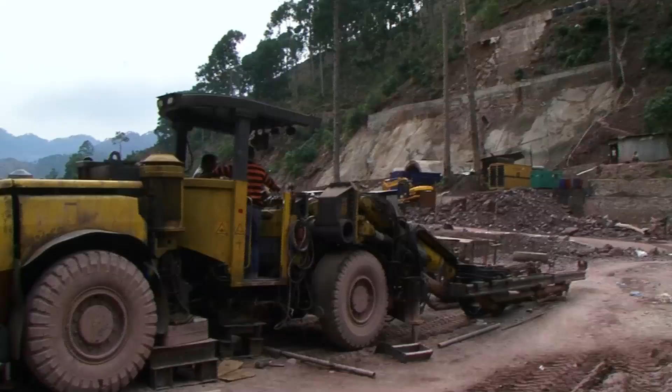Cradled in the lap of the majestic Himalayan mountains, Kashmir Valley is crowned as heaven on earth. In spite of the looming threat of terrorism, Kashmir is undergoing a paradigm shift in its developmental activities, connecting its vast inaccessible areas, bringing boons of technology and benefits of civilization to snow-capped mountains and beautiful landscapes.

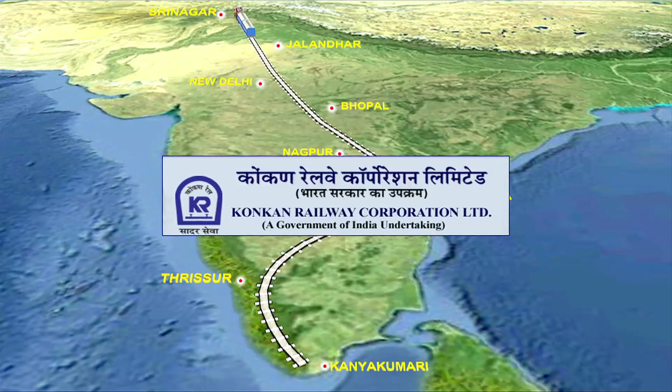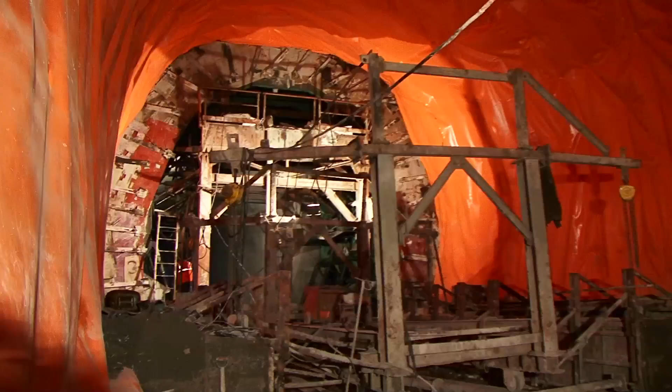With the aim of connecting Kashmir to Kanyakumari via railways, construction of the Udhampur-Srinagar-Baramulla new BG Railway Link project was undertaken by Konkan Railway Corporation Limited to improve interconnectivity within the state of Jammu and Kashmir. Difficult terrain, harsh climatic conditions, snowfall and severe winds throw steep engineering challenges that pose a threat to this national project.

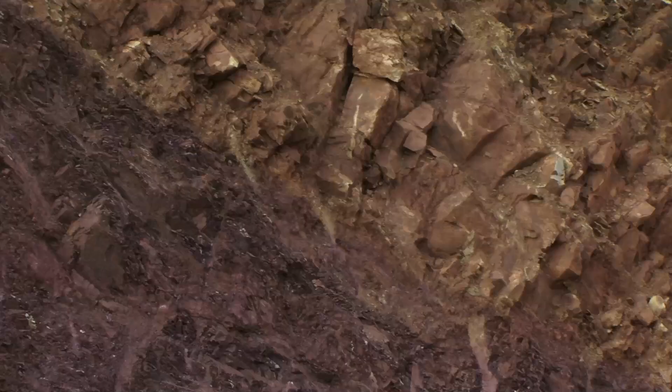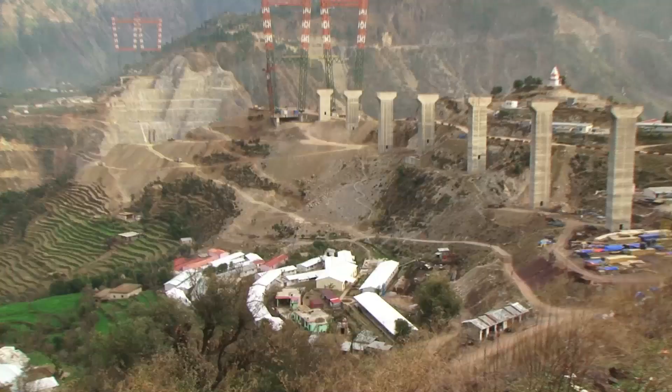The mountain ranges along the Chenab River Basin are made of sedimentary rocks, which is very different from the rock quality experienced by KRCL in the Western Ghats. A work stretch of 22 kilometers in hilly terrain with poor rock formation, landslides during monsoons, and similar other geotechnical issues were worse challenges. In addition, remote and inaccessible locations with narrow, heavy steep gradients and almost no road condition constituted tremendous communication constraints. Availability of resources posed a problem, with the nearest city Jammu being 125 kilometers from the Batli camp project site.

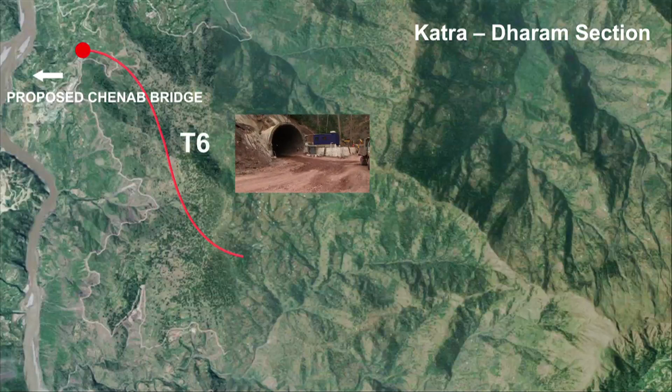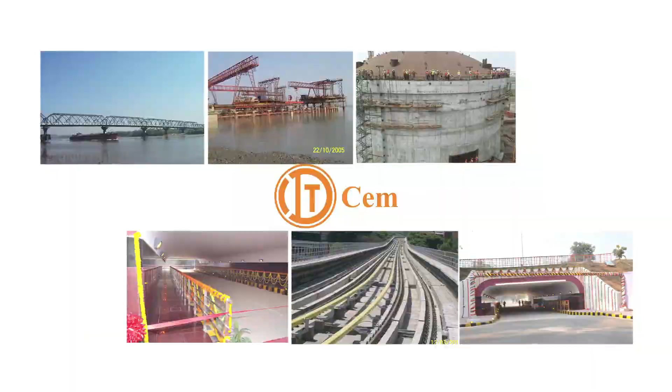KRCL awarded construction work of tunnels T6, T9, T10, T11 and T12 between Kauri and Dugga on the Katra Dharam section to ITD Cementation India Limited, a company with more than 8 decades of expertise in design and development of infrastructure in India.

Tunneling in India is always a challenging task, but if it is in the Himalayas, then it becomes more difficult. To overcome these things, we made extensive planning. We have mobilized state-of-the-art equipment so that the work can be done smoothly. We have also engaged experienced and trained engineers along with experienced technicians for safe and hassle-free work.

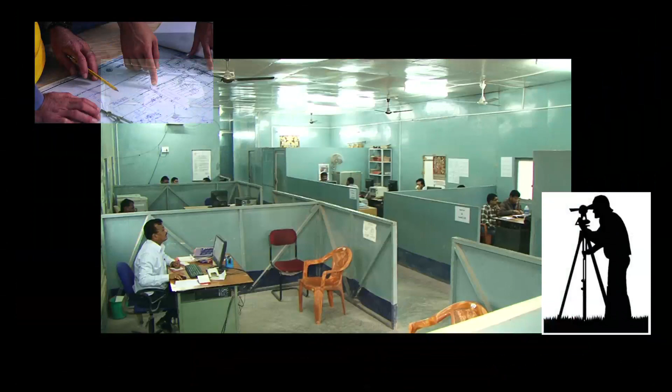Comprehending the challenges of this project, ITD Cementation India Limited brought in a huge pool of qualified personnel commensurate with required expertise, including geologists, surveyors, civil engineers, mechanical and mining engineers, safety engineers, and other technical experts to handle any situation and provide quick and efficient solutions to problems as and when they arise.

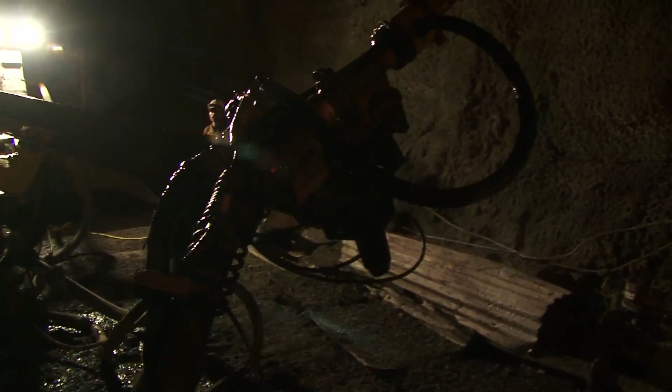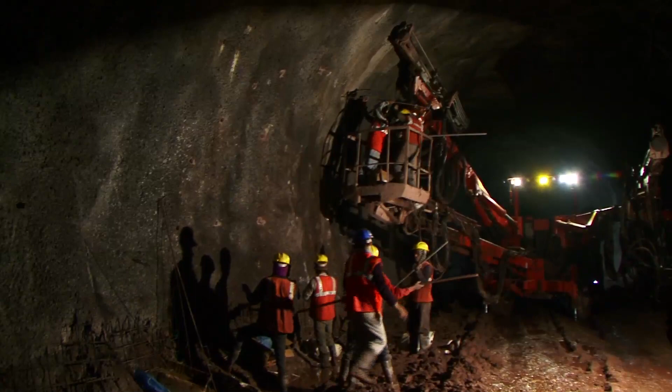All major high-tech equipment and machinery required for this project have been imported, and some designed and fabricated in-house by ITD Cementation India Limited. Specially imported machines like the Sika shotcrete machine and twin boom jumbo drill machines are important machines of tunneling and require regular maintenance from skilled mechanics.

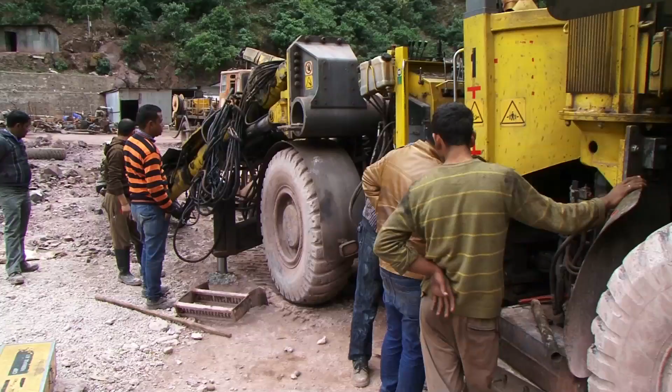State-of-the-art workshops are equipped with all required machinery and skilled workforce to handle any type of breakdown of machines and equipment. It reduces idle time of machines and improves cycle time of tunneling activities. As a result, ITD Cementation is in a position to address any issue concerning machinery immediately during project execution, saving time, cost and eventuality.

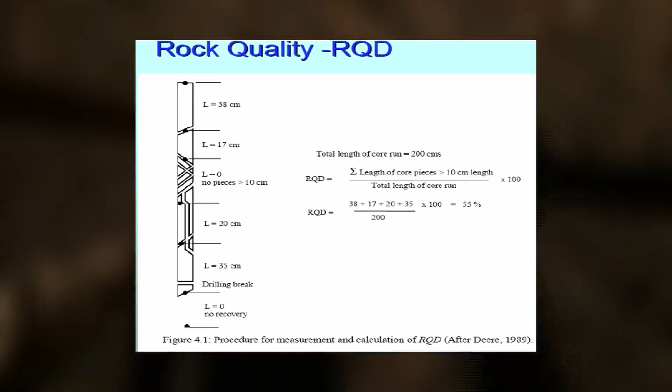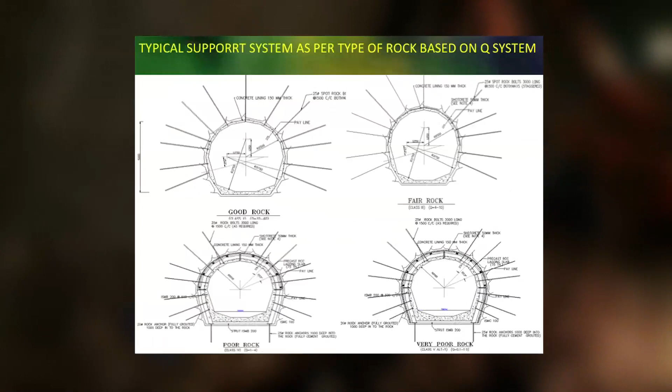Tunnel excavation is being done following the NATM method, wherein systematic analysis is done of rock quality and a systematic support system is provided as per classification of rock by expert geologists. For classification of rock mass, the Q value system is followed.

Geologically, our project lies under a very young formation. It is sedimentary rock, and the main types of rock we found under the tunnels are sandstone, siltstone and claystone. But the dominant rock is siltstone. It doesn't have good strength.

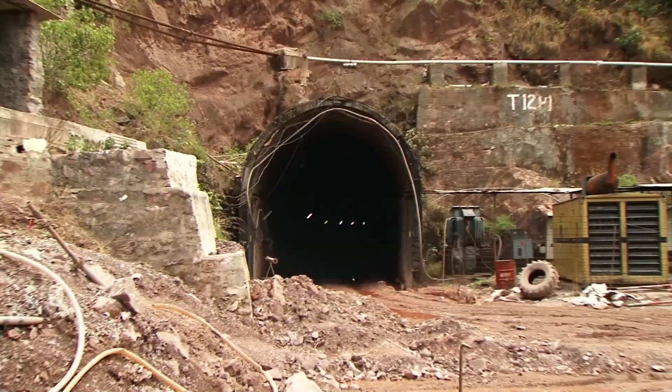Each and every aspect of tunnel construction is monitored. If a problem crops up that cannot be solved at site, headquarters is informed and response time is immediate. More experts arrive and, together with the existing bandwagon, they put their heads together in finding an immediate solution.

The first step undertaken in this project is creation of approach roads to sites of operation. A base camp is set up at a suitable location near the project site, followed by a site office. For every tunnel to be constructed, operating sites are identified and set up by installing necessary infrastructure, machinery and equipment.

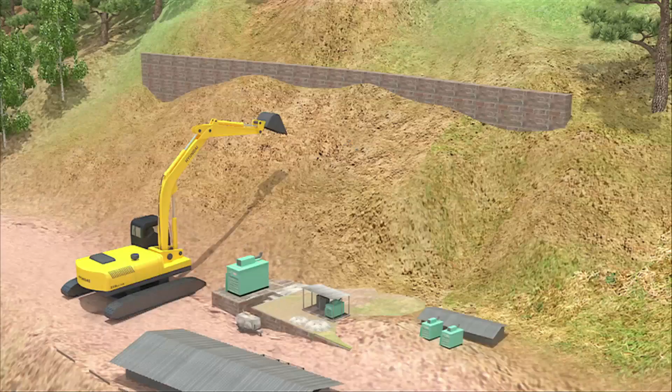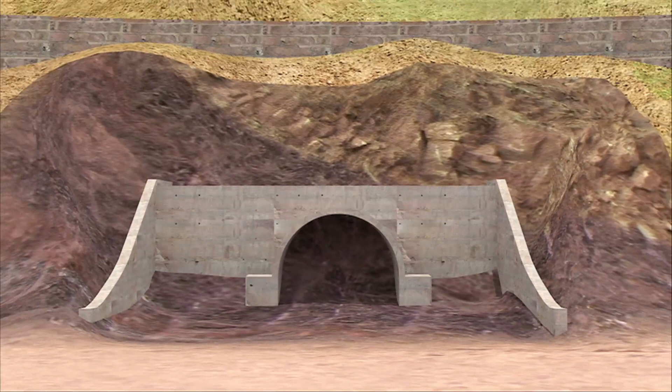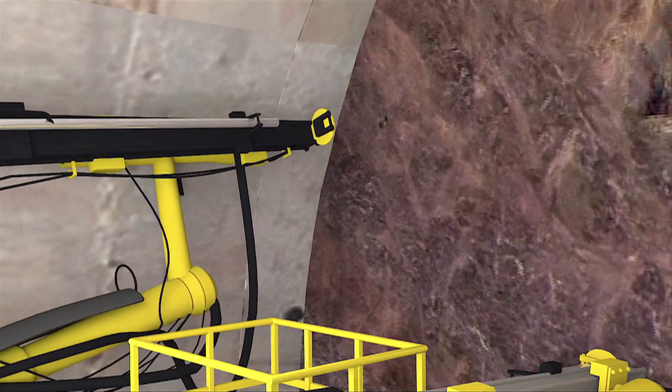Before the actual tunneling process starts, a false tunnel section is excavated and RCC lining is done, and then actual tunnel excavation begins. Actual tunneling starts with portal construction, with size greater than the actual tunnel size. Pipe forepoling with high pressure cement grouting is done for roof stabilization.

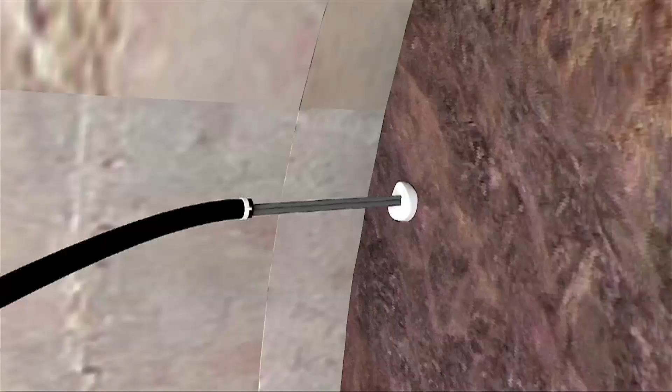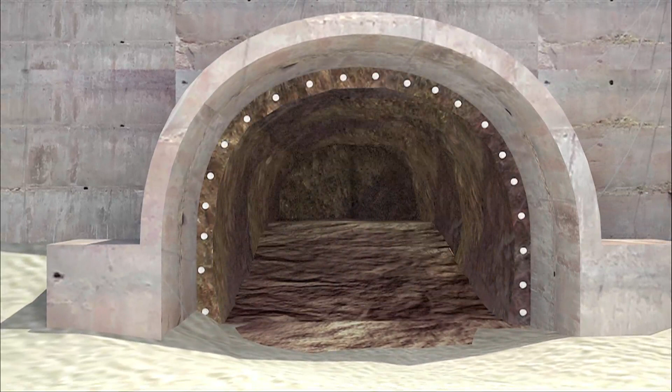And then actual face drilling starts with twin boom jumbo drill machines, followed by charging and blasting with explosive drilling. Blasting is carried out from center in small units for a distance of 10 to 15 meters, creating pilot holes. Eventually, the full shape and size of the tunnel is achieved. Now, repetitive tunneling method begins.

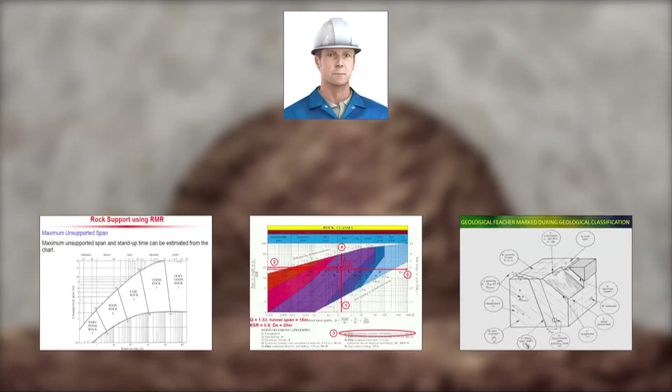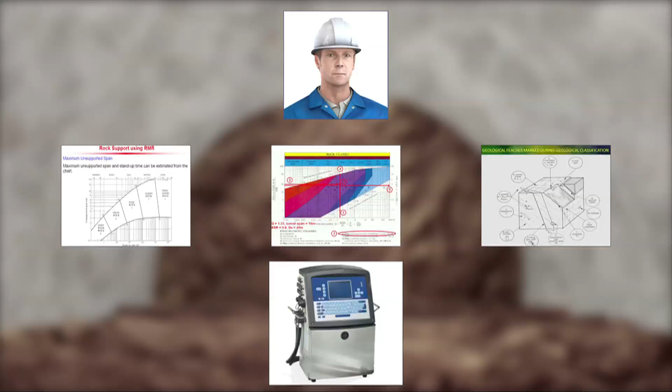Geologists and surveyors analyze class of rock after every round of blasting operation and find Q value and RMR value. Depending on the class of rock, rest of tunneling steps to be undertaken is formulated. Geologists and surveyors collect data with help of profiler machine and plot them on paper. Charging patterns change with change in rock class.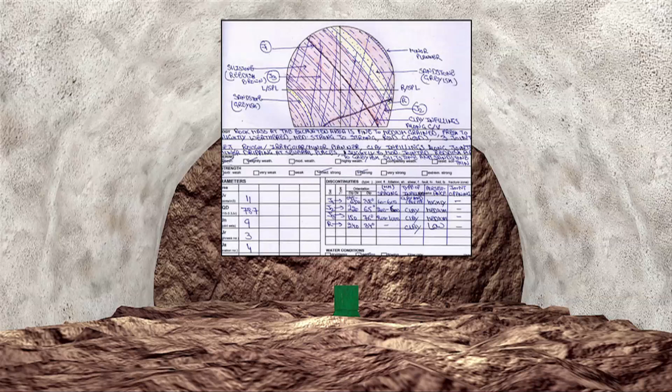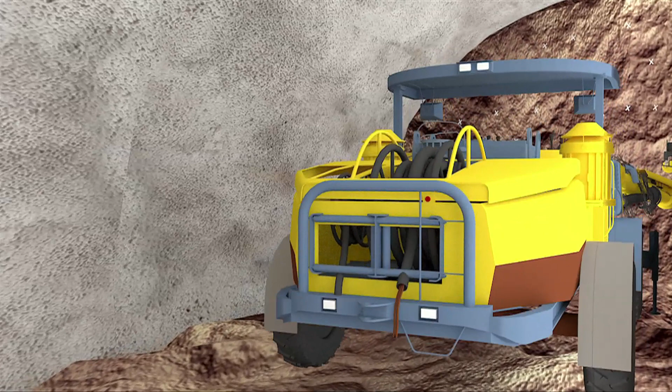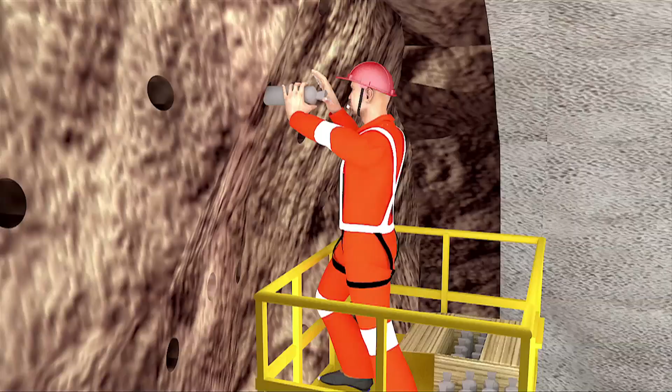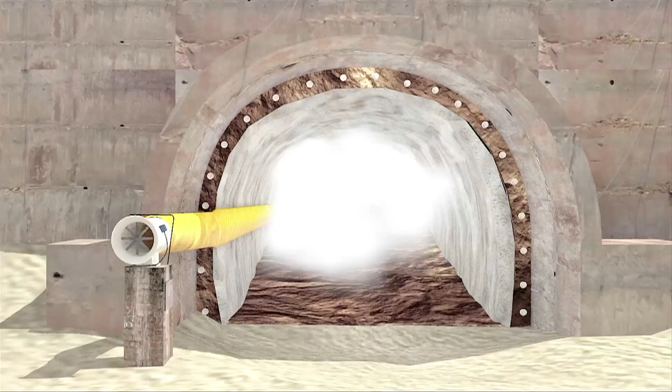Based on this data, drilling and blasting pattern is prepared. Drilling and blasting is carried out as per design pattern. These, along with charging pattern, is the heart of successful tunneling. It is followed by defuming for about 30 minutes. Water is sprayed all over blasted surface to settle dust and to reveal cracks and fractures.

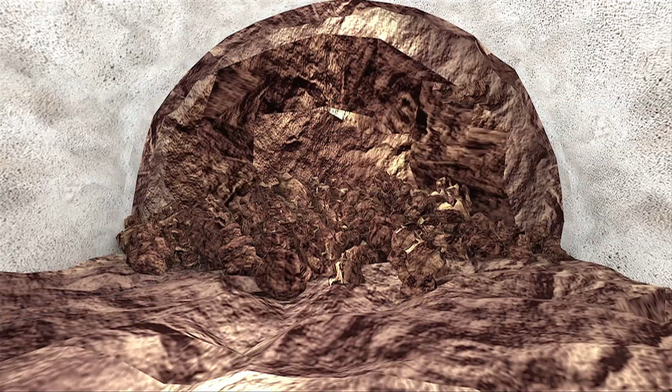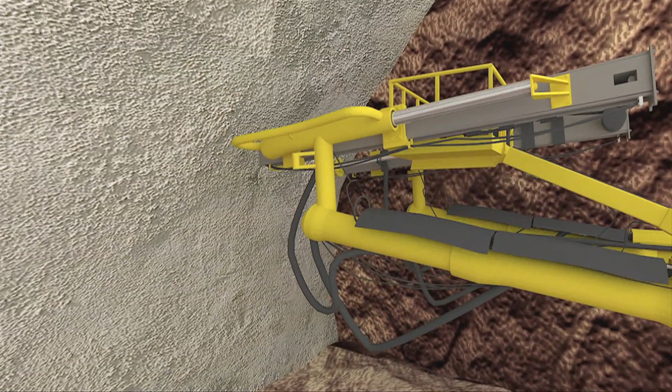Next step is mucking. Once muck is removed using excavator, geologists and surveyors again evaluate region, provide support system design and collect data for the next blast. Primary shotcreting is done with robo-arm shotcrete machine. Rock bolt drilling and grouting is done as per rock bolt design given by geologists.

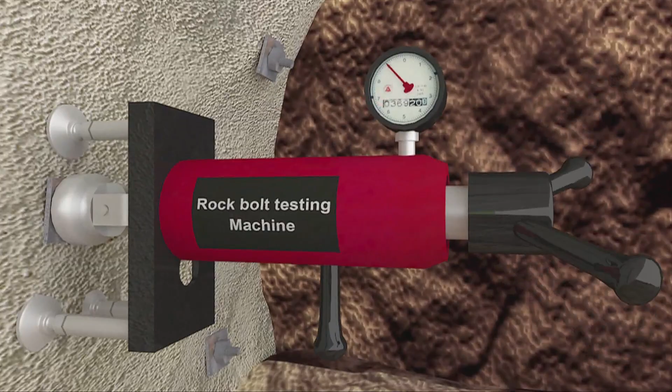Depending on rock class, plates are fixed and bolted and predefined amount of torque is applied. Rock bolts are then tested for load-bearing capacity after 15 days. As per requirement and based on geological evaluation done by geologists earlier, preliminary support structures like wire mesh or lattice girder may be erected, after which final layer of shotcreting is done. The process is then repeated for next round of blasting as per the requirement.

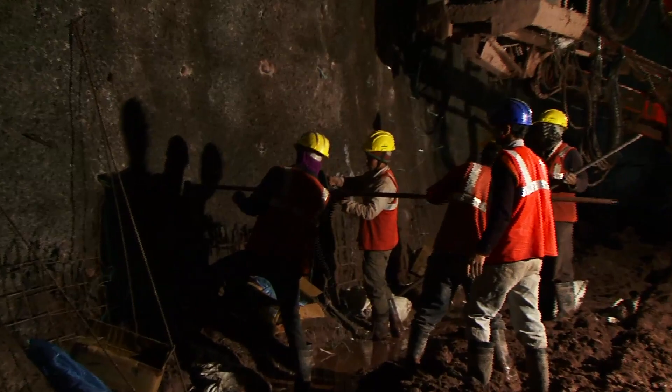Monitoring of critical aspects with instruments such as extensometer, pressure cell and load cell are carried out after every 10 meters of tunneling. If there are any variations or problems, adequate steps are taken to correct them, like changing supports and so on. Following this methodology, tunnels 6, 10 and 11 are being constructed from both ends, while tunnels 9 and 12 are being constructed from one end.

In case of tunnel construction from both sides, when 10 meters is remaining in between, a central hole is drilled from one side to the other to check and maintain alignment. Then one side is closed and digging is completed from the other side. For rock class 3 and above, the tunneling is done first with heading, and then in the same process, benching is completed.

Once tunnel has been excavated from one end to the other, entire tunnel is cleaned. Geologists evaluate and survey once more. Gantries are introduced into tunnel if possible, from upward direction to downward direction. Geotextile membrane and waterproof membrane are fixed to ensure no seepage water comes after lining.

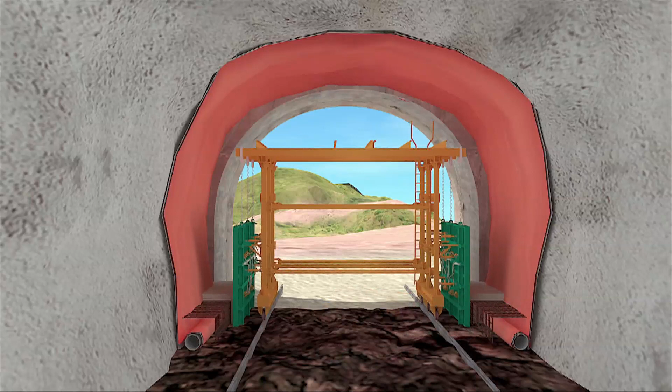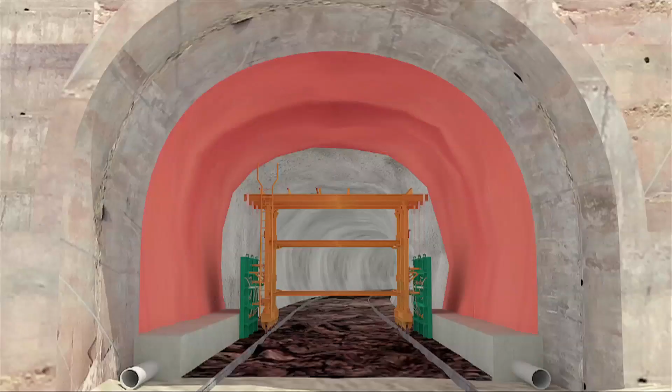Kicker gantry pours concrete on two sides, creating side slabs. Perforated PVC pipes are embedded into them. Then kicker gantry moves forward. Main gantry is then fixed, which pours concrete by pumping and completes concreting process.

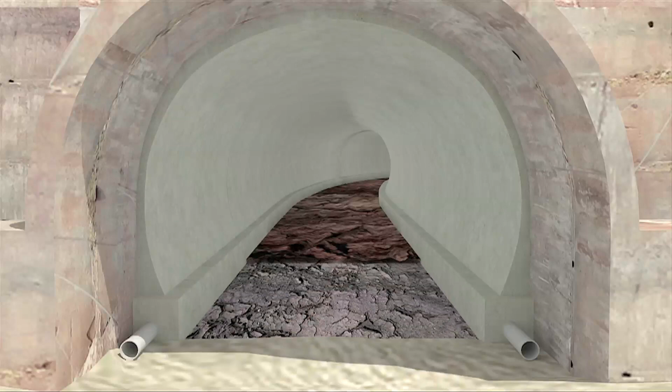Once entire tunnel is completed, kicker gantry and main gantry are dismantled. After that, floor is washed and cleaned. RCC concrete is poured. In this way, kicker arch and invert concreting are completed. All the portals are finally stabilized with required support measures to ensure no loose fall occurs.

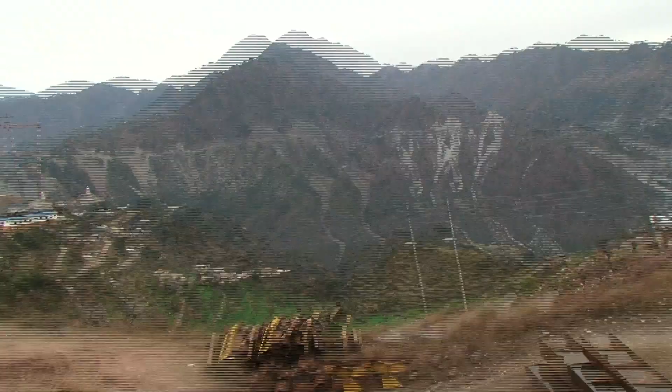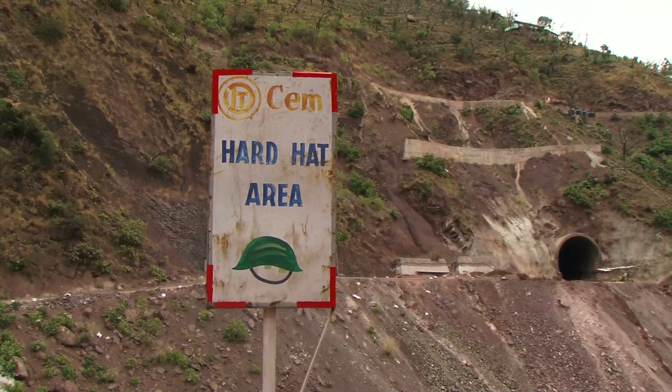Due to adverse geological and weather conditions, safety plays a critical role. Risk assessment of each activity is done in advance, and controlling measures are also taken to reduce risk from technical or administrative measures. Regular toolbox talk, training and induction are routine jobs. Complete injury-free site with zero accident is the set goal of the company. Due importance and care is given to environment and ecology of nearby site area by safety department.

Our site target, zero accidents. For achieving the target, we have done risk assessment, training, toolbox talks, periodical audits to check our system to enhance the project.

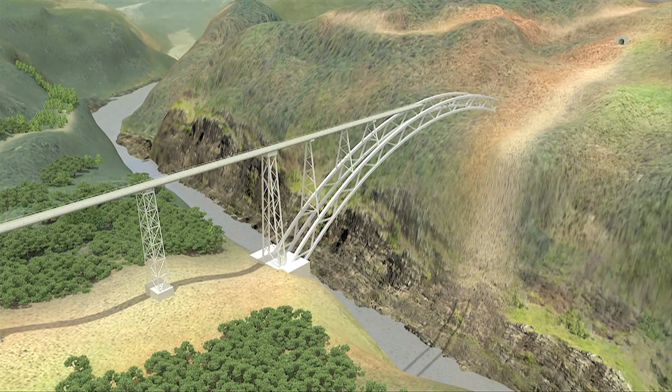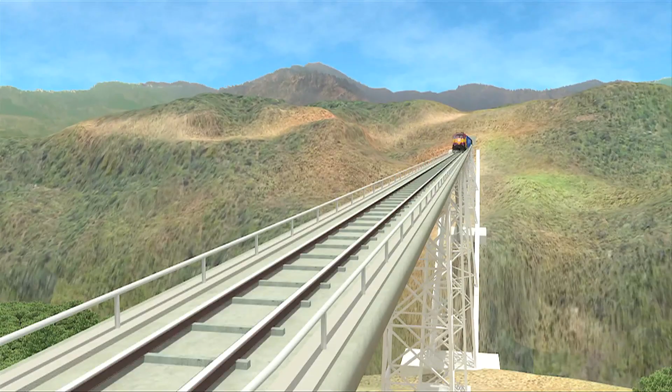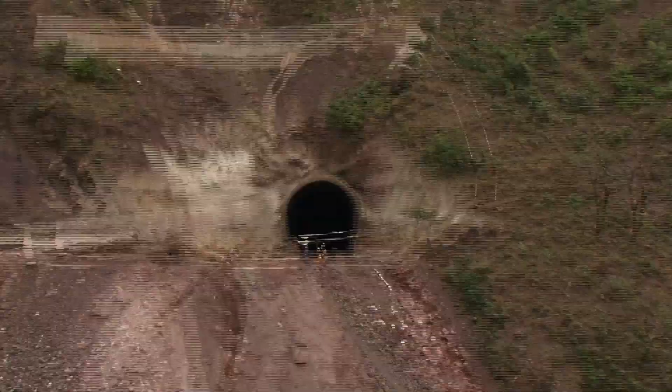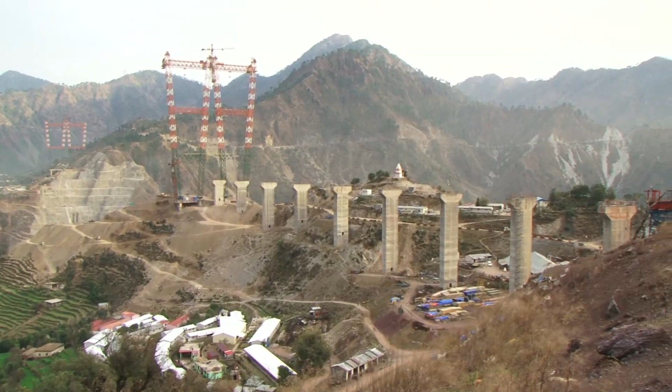Following this methodology, ITD Cementation is carrying out tunneling work of 5 of 43 tunnels to be constructed in this region, with the recent addition of tunnel number 1 passing through Reasi Thrust in its basket. The USBRL project is perhaps one of the most difficult engineering projects undertaken since independence, with great strategic importance of both economic and military nature. Once completed, it will be a feather in the cap of Indian Railways and another great milestone reached for ITD Cementation India Limited.